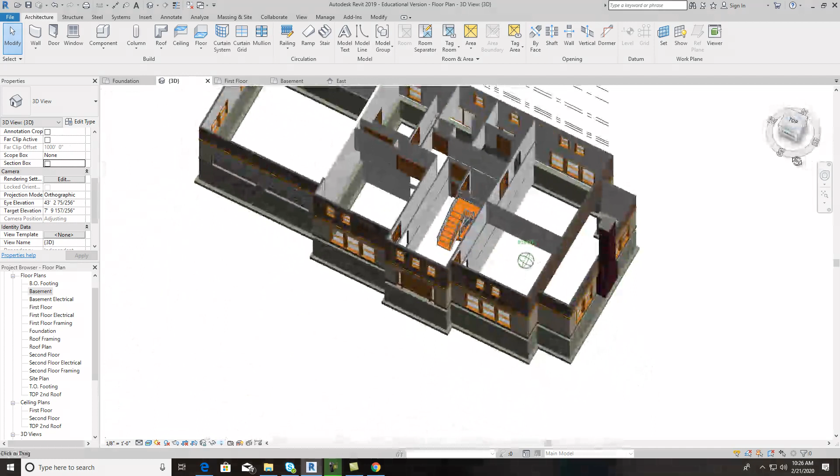Welcome back, and we have got all the stairs in now. We've got the basement walls in. We got everything looking pretty good. Now, we're going to go into the first floor, and we are going to annotate this thing correctly.

Now, in your text, there is an annotation section, and we will get into that as we get into some more drawings. A lot of the things that's in there, like notes and things of that sort, we will get back to that. And a lot of these door tags and windows, we'll get to that as we get further along.

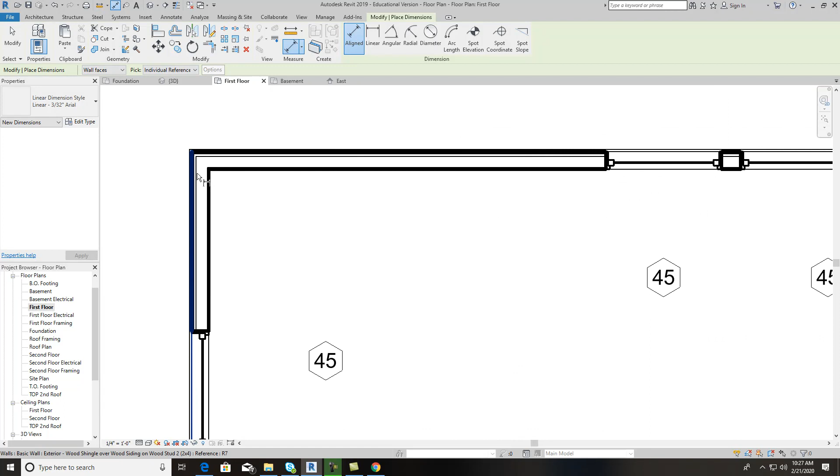So what I want to do right now is basically show you. Just go to Annotate, and I'll show you how to properly annotate a drawing. So we'll save the project at that point. Anytime it asks me to save, I will, because I don't want to lose anything. So anyways, I want to start out with aligned, wall faces, and like I told you, get that line right there. You don't want the exterior, because that exterior is going to be like siding. So that right there is what I want to grab.

And I'm just grabbing all of the exteriors here. Grab all that and bring that up. Go right behind it, and I'm just going to grab my overall of the whole thing. Kind of do it in like little stair steps. Just like that. The next one you're going to do, you're going to go back in. You're going to grab there, and you're grabbing just walls only. You're grabbing all the walls, okay?

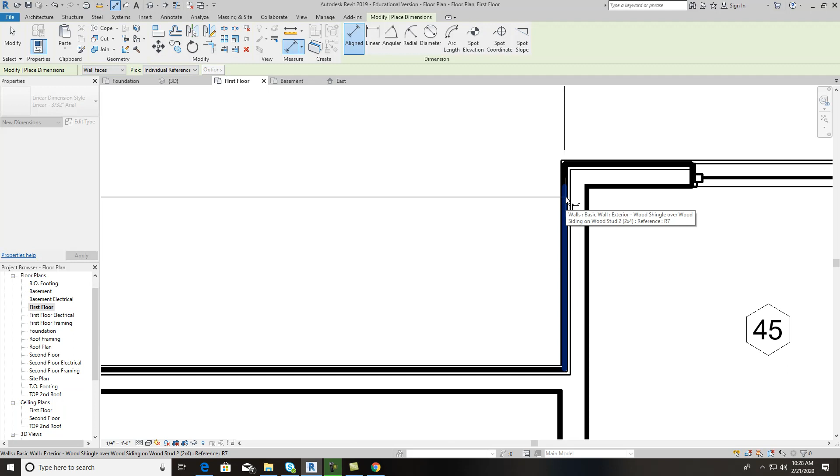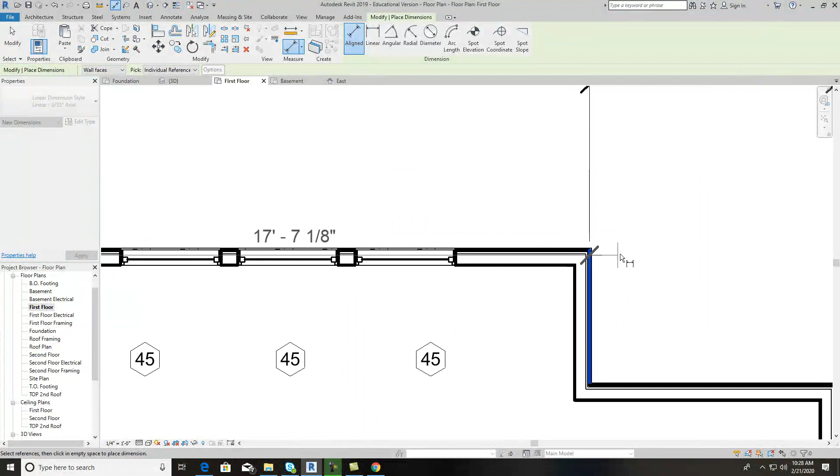I need the center on this one, okay? So we'll catch the center of that wall. The interior walls will be to the center. And I'm shocked it let me do center on that one, because most of the time you have to do wall center line. And I'll keep on coming over here. And this one should be on the wall face. And then again, wall face.

Now, I cannot remember off the top of my head if this is all. Everything should be accurate on here. We'd have to go back there and look at those actual dimensions inside just to make sure. We've done a good quality check on that. You guys did in the last week, but all of that should be correct, because those are following that. We should be just fine on that.

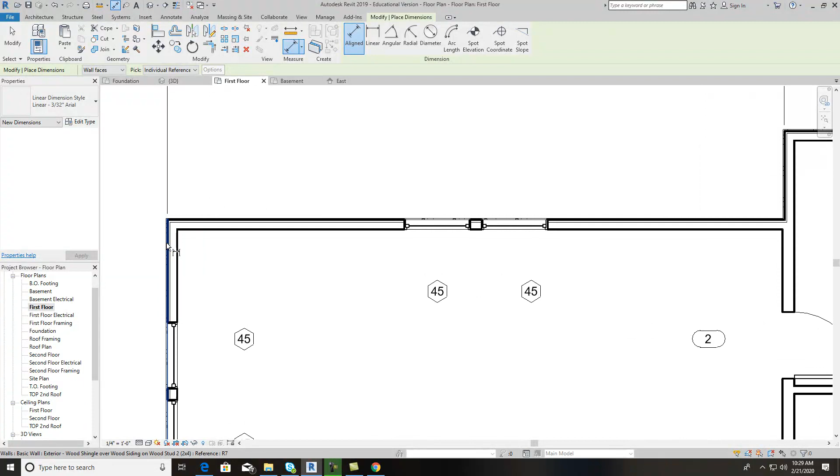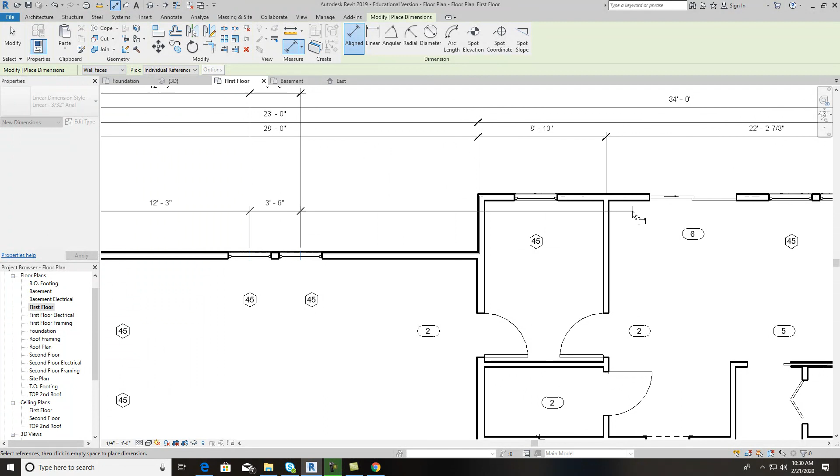The next thing you want to do is hit aligned on wall faces. Hit your wall face again, and I want to catch the center of these windows. And that would be your next thing, is center of windows. And you just catch your center points. And basically, wall faces. You catch everything, and you still can with wall faces on. And this one actually has to catch the center of that one, which is pretty nice. You're grabbing everything down through here.

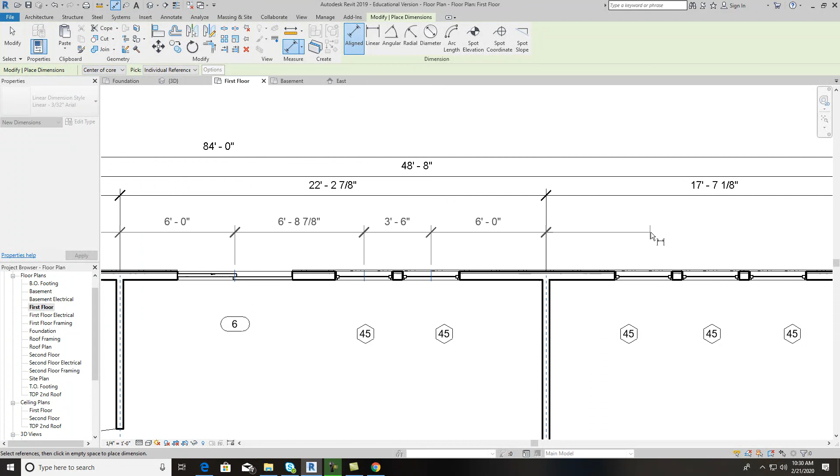Now, my window measurements might not be spot on. I don't think I actually measured those out last time. I was just showing you guys how to put those in. So if they're not dead on, don't hold that against me, right? But I want you guys to have yours dead on, right?

So wall faces, and then of course the wall face out here. And you put all that stuff in there just like that. And now you go all the way around this thing and you do that. And also, we'll do this side. You come from right here to right here. We'll go ahead and just get the walls. We'll pull that back. We'll go ahead and grab from there to there the overall.

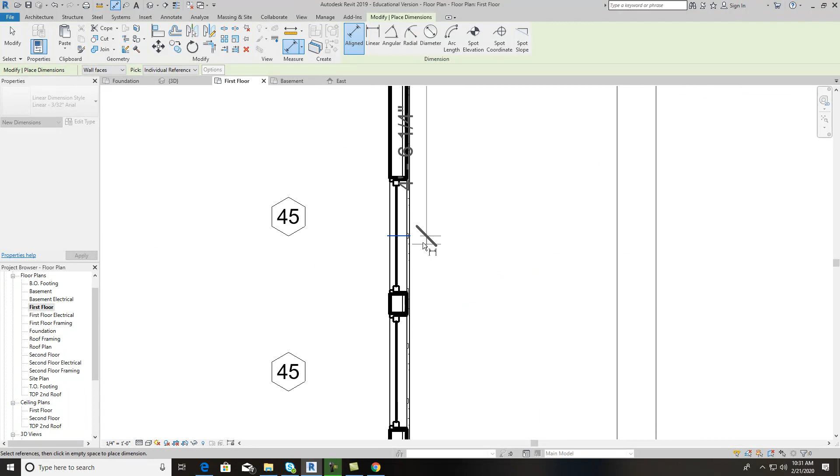And now you're going to go in here and grab everything again, including the windows. And like I said, my window spacing might be a little bit off. So like I said, my windows might not be in the accurate spot because I just went in there and put them in just to show you guys how to do it.

So the actual drawings that we had last time that were on here, and you guys went through and made sure you had everything located properly, that's the main thing that we want to look at and make sure these are right. And I found the windows here, and it looks like 5, 6, 3, 6, 3, 6 were right on that one.

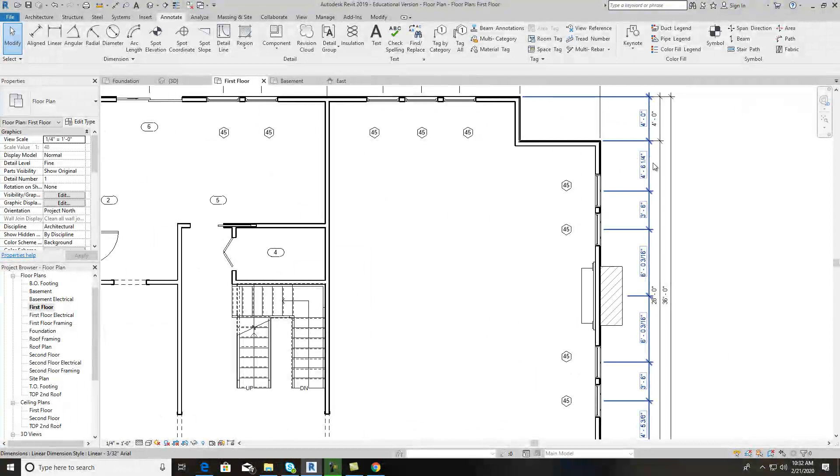I'm looking for the end here, and this one should have been from the edge. It should have been 4, 4, so I want to change it real quick. 4, 4. Okay, and it should have been 3, 6 between them. Is that looking better? And then this one down here should be also 4, 4. And this one should be 3, 6. And this one should be right in the middle, and it is not. So I want to take that and see, let's move it.

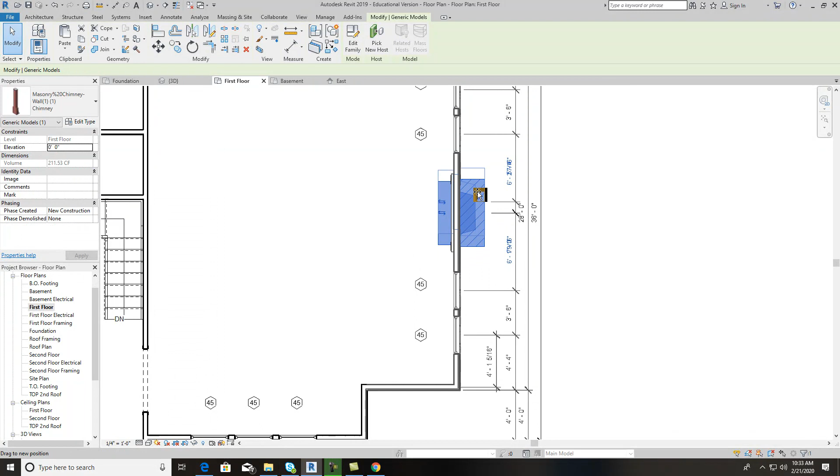And a little trick here that I use sometimes if I want to center something up, and there isn't a line that you can line the middle of that wall up. You could do that, but this is just an old school method. Kind of old school, but anyhow.

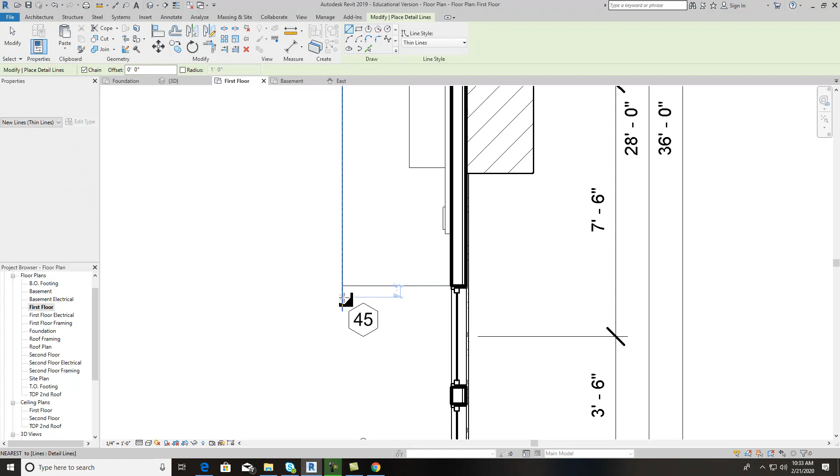I put me a line there by using my Annotate detail line, and I'll find the center of it. And now I can use my Modify tool. That way I know I am perfectly lined up. And I did that wrong—I lined this first and then this. That way you know that thing is right in the center, right in between those windows.

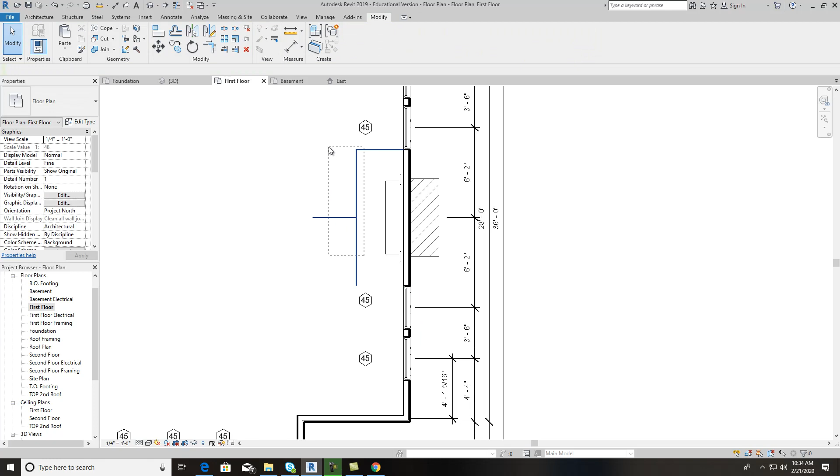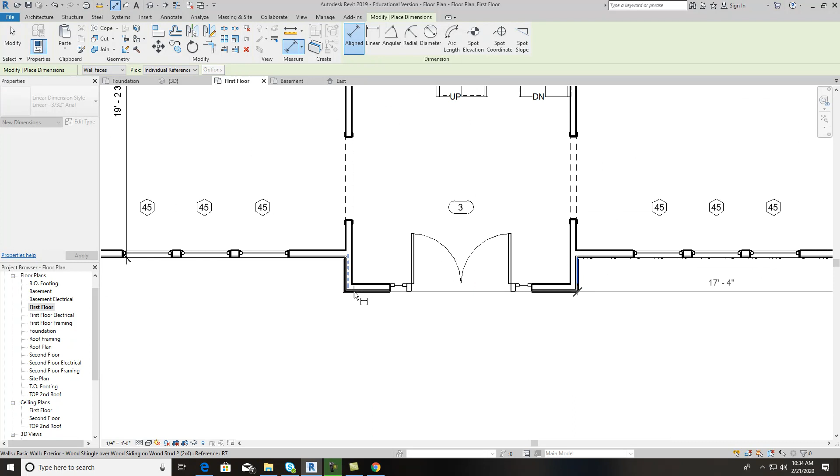And I'll get rid of that one. All that looks good. So you come around the front of it, annotate, align. You grab that—we're grabbing the outside walls first. Get all those. Make sure your measurements are accurate. Pull that out, go back in with a line and get your overall.

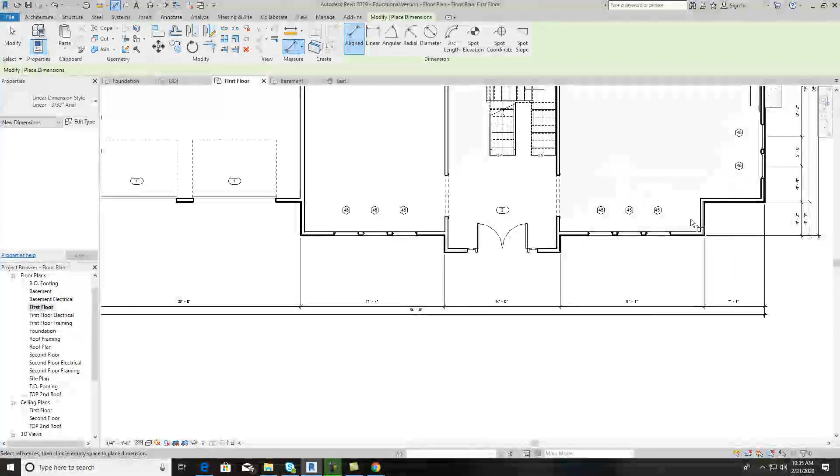And the reason you go all the way around something like this is so that you get all the measurements. You're trying to keep from putting measurements inside of the house. You're going to have to put some of them in there, and we know that. But this right here is an excellent way of doing things to keep you from having to put so many inside.

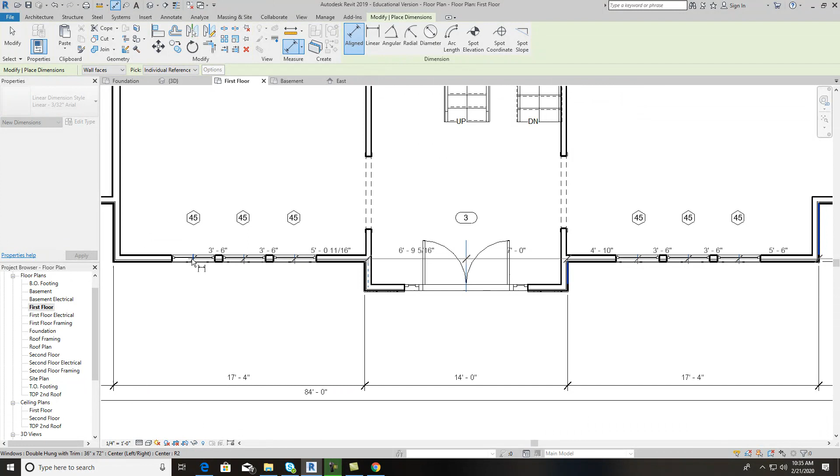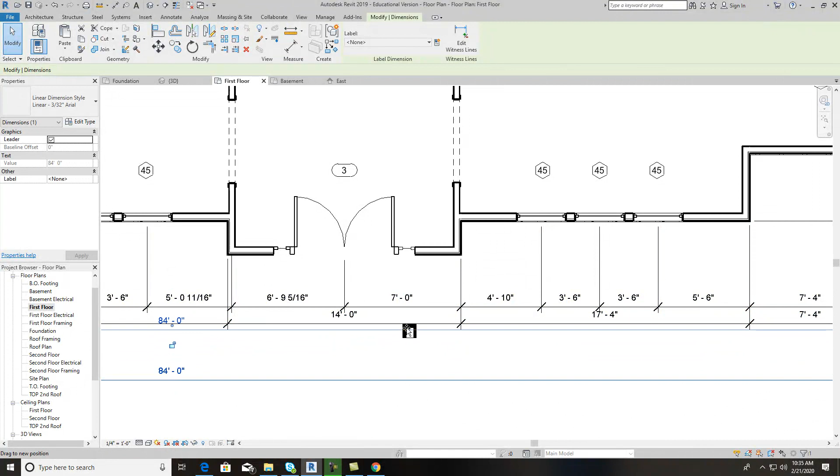And it does take a little time. We need to pull that in. They usually typically say on your print, when you print it out, you want about 1.5 inches distance from that wall to this on paper. So you just kind of roughly eyeball it and try to keep everything about the same distance away so it looks good on paper. We got one more side to do, and we'll have this thing whipped.

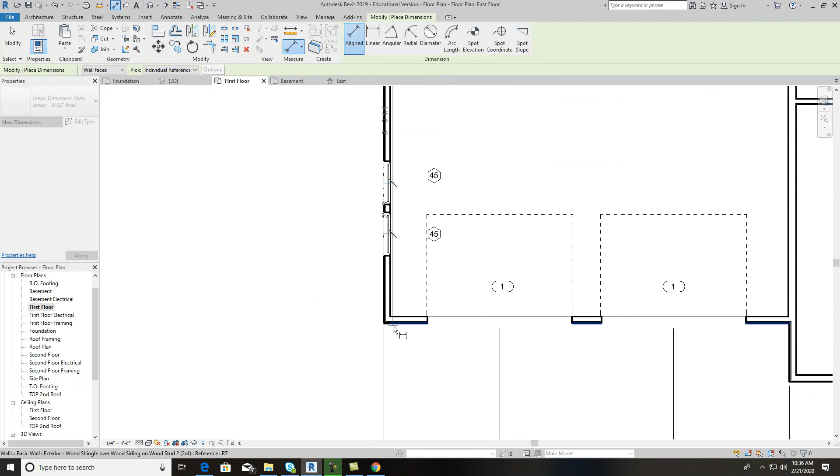Again, I'll check those windows, make sure they're in the right location. We'll pull that out about right there, come back in and get us another.

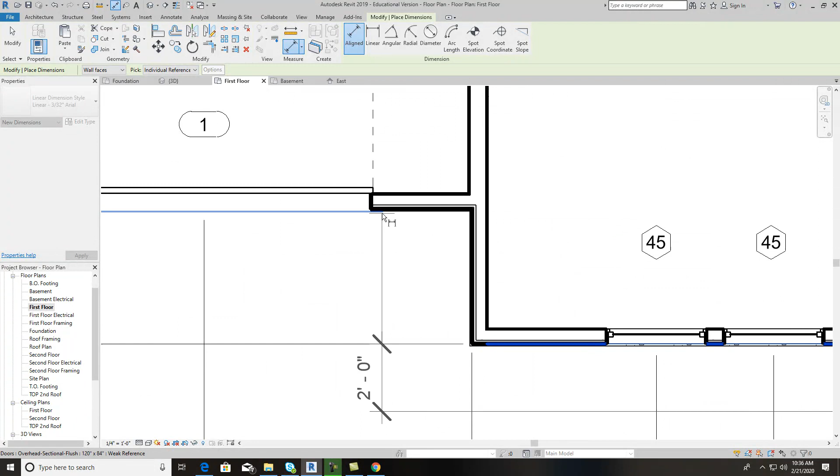And I know a lot of this stuff is redundant—we've done it several times already, a lot of the dimensions, but that's fine. I would have too many dimensions on it than not enough. Pull that over, just like that. Then, of course, you'll have your overall.

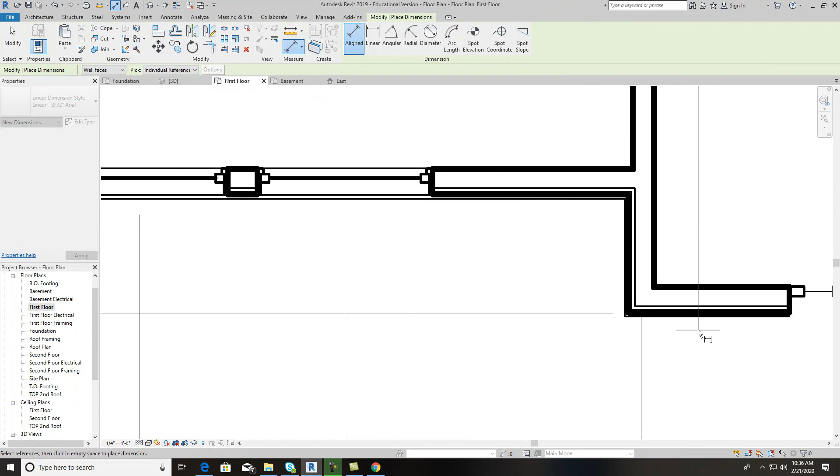And there you go—so there's all the dimensions on the outside of this thing. And now there are going to have to be some inside dimensions because not everything got dimensioned accurately. So we got to go to the inside.

And like these doors are lined up, so you could actually just put one from center to center. This one here, you can go ahead and put that in there. This one's already located, this one's located, this one's located. Now, this one right here would probably need from center to center. Okay, it is now located.

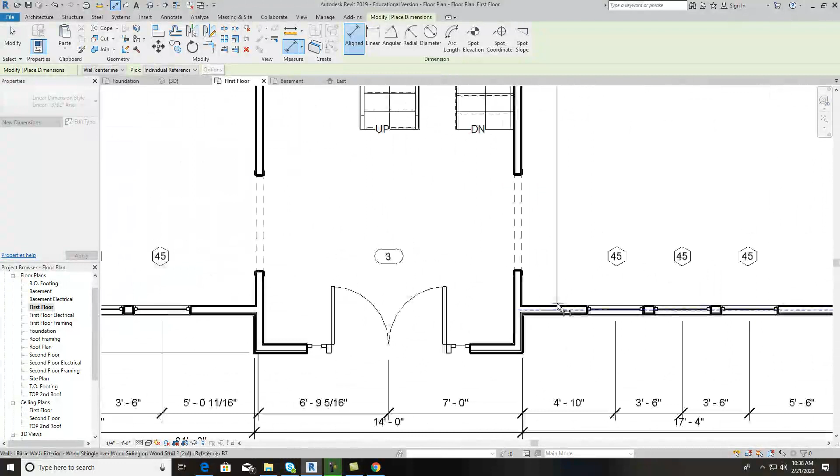This one right here is on that. So we actually, if we went from the center of this and we went all the way down to wall faces and catch this one, that's perfect—we'll do that. So it comes up here, it gets this, and that's lined straight up with that. The only other thing I see is probably, well, actually that one's good. It's got that—it would probably just be, and that's lined up with that.

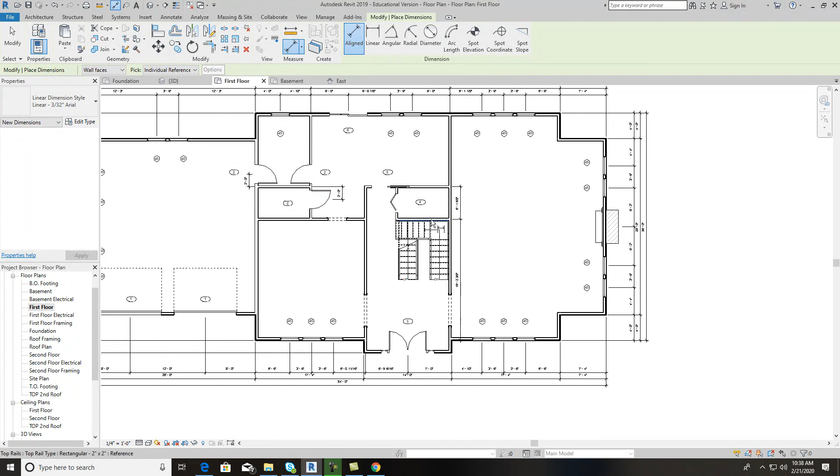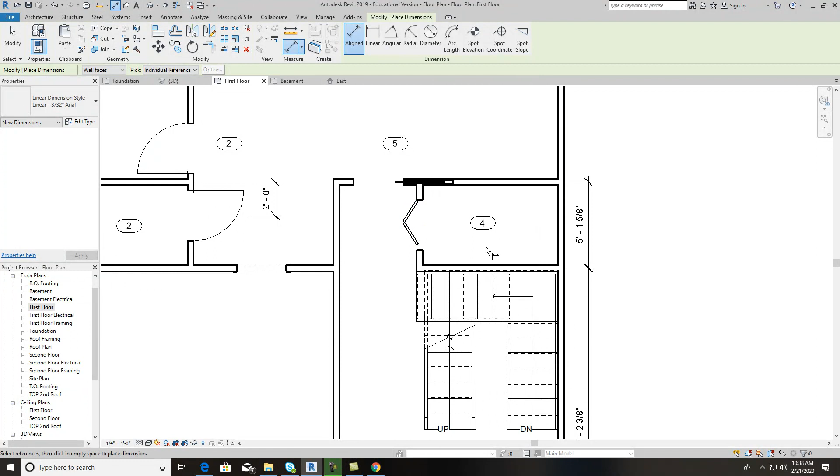So, without cluttering it anymore, it's just like a lot of times, like these doors, see how they're 2 foot away from that? You could put 2 foot typical somewhere, interior doors from wall—you can make the note, you could do that. Now, like this one, it's going to be for the contractor—they can just put that sliding door, they can actually put it in the center of that wall. So we'll just leave that as is right there.

Everything looks really good, so we got that first floor done. Now you want to do your second floor. So we go to second floor, and again on the second floor, we're not going to be able to see this. We're just going to be able to see the top of it.

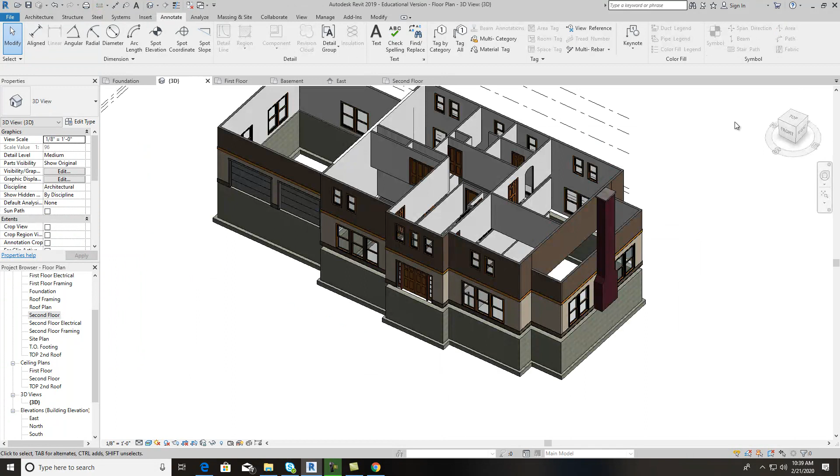And I want to go to 3D real quick, let's take a look. Okay, so second floor, all we're going to see is just this section here. We're not going to see these.

And we can do a clip plane to that to hide those sections, because that wall goes up really high, so that way we just have this. But I'm just going to keep it on there. I want to keep this on here just so that the contractors can see those sections of the underlay of the house. And a lot of times they do that with hidden lines, you'll see sometimes.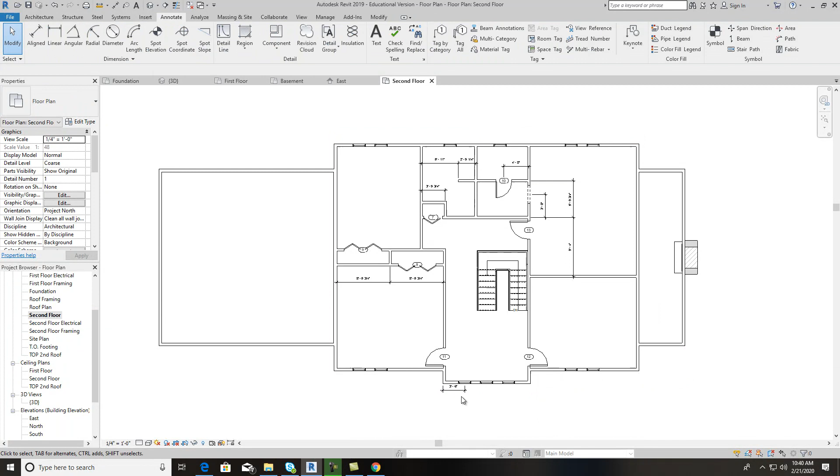And basically this is what we're going to do on this one—we're just going to do the same thing, align wall faces. We're going to catch this and this. And then we'll come in here and grab this. We got to get the centers of those.

I meant to get the walls only, but we'll go ahead and just grab everything down through here. And like I said, I don't know if I've got these windows in the right location or not. That's something we could check out later. Don't change yours if it's different than mine, because I just threw those in one day when I was putting this on in a video, just to show you how to put windows in.

But get our wall face, and then I want to go to center of walls. Grab your walls only, and then grab the face again out here. And there we go, for that. Then come down on the sides just like we did earlier. Start up here and come down to here.

Really, it would be nice if we just took those out. So let's do that real quick. We can do cut plane. Slide down, escape out of everything, just have your properties up, and you can go down to view range.

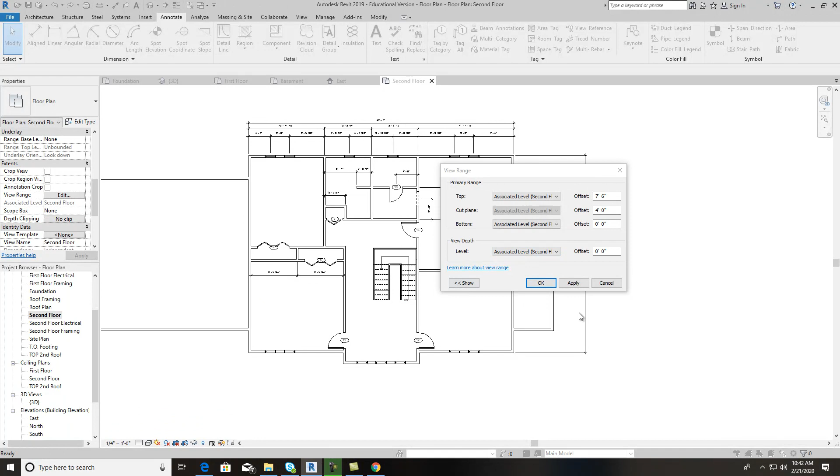This is associated to the second floor. Okay, and our view depth is the second floor. So I want to cancel. I want to make sure that I don't have any underlays on. And I don't. Okay, so let's go in here and look at my elevation.

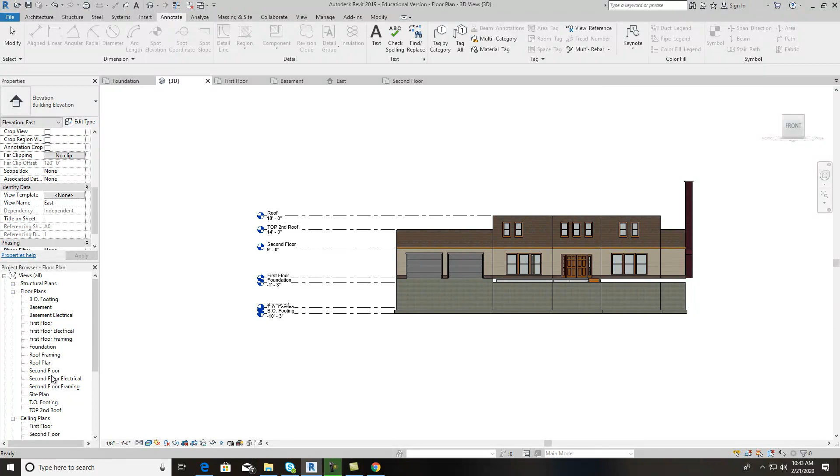Let's see, the second floor is right there. Okay, 3D. So second floor, that's why you're seeing that. This is going to the top of the second roof. And that's why we're seeing this section in, because this is a really tall section of wall here. So we'll just leave it in because of that, because I didn't know if it was under that second floor or not, but it's not.

So we're fine with that. We'll just go in here and get the rest of it. Center that and come down here and do a wall face. Bring that out there. And we'll do the same thing over here, bring it all the way down there.

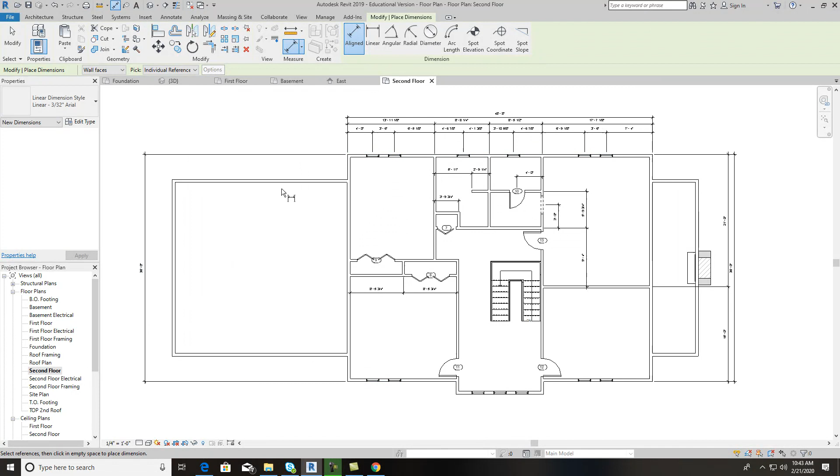Now there is an option we can do. If we want to hide this, I'll show you a trick. Remember them sunglasses? Check this out. You can grab it, hide element. You didn't delete nothing, you just hid it. And you can do that if you want to. Whenever you print, you're just going to make sure that that stays off.

And like over here, I can grab all this. You're not deleting nothing, hit Control to grab extra stuff, and hide the element. Then you can draw this stuff in a little closer to you. You see that? So you can do that. You definitely can. And then you can go in here and it looks a little bit better to do that.

And there's that different walls that we had, if y'all remember that, for that different thickness. Kind of looks weird up here, but it's okay, because that's exactly what it needs to be.

You grab that, pull it right on top of it. And then we go here in the front, align, and we'll grab that, grab our windows, grab that, grab our windows, grab that. We're just grabbing everything at first, pull it down. That'll be the first one. The next one will be just walls only. We'll pull down here. And then you'll have your overall.

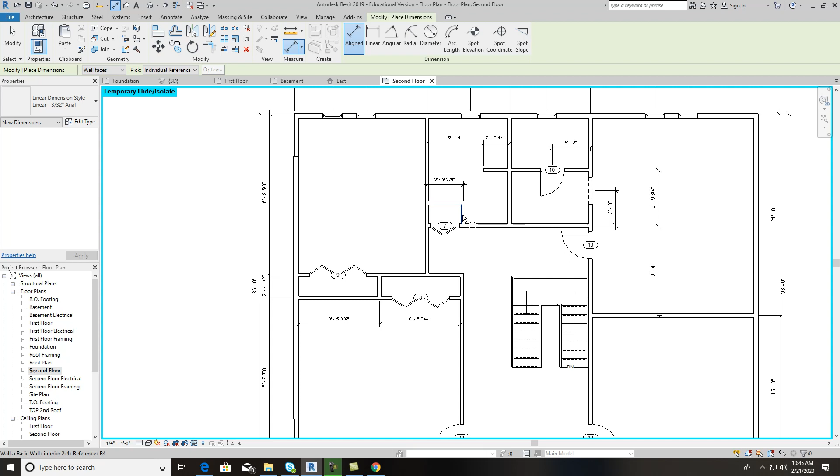Just like that. And then you just go in and see if there's anything that you need. We already had some dimensions. That's fine, that gets those. It gets this located, that's located, that's located, all that's located. Looks perfect. And you might want to put a couple in here with this stairway.

Okay, we probably want to do something like that. Just put us a dimension in, it's 8 foot, 9.5. Okay? And you can also put, and you'll probably put a note on there, and this is how you can put a note on there. Go up here to Annotate, Text, and this is how you text.

Right now it's a 3/32. I want an 1/8 of an inch text, and I've got one, 1/8 of an inch Arial text. And I want to use one of my leaders, and I come up here, and I can tell them exactly what that stairway is. I can tell you it's 3 foot wide. Make sure you cap your letters, 3 foot wide.

And you can go in there and tell them exactly what the riser height is, 6 3/4, 11 inch. So I can double click that again. So the riser is 6, 3 divided by 4, 3/4 inch. And then the tread is 11 inches. There we go.

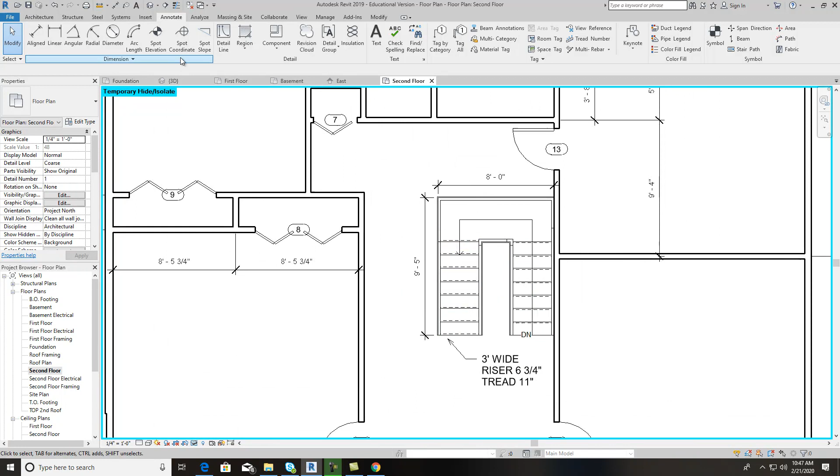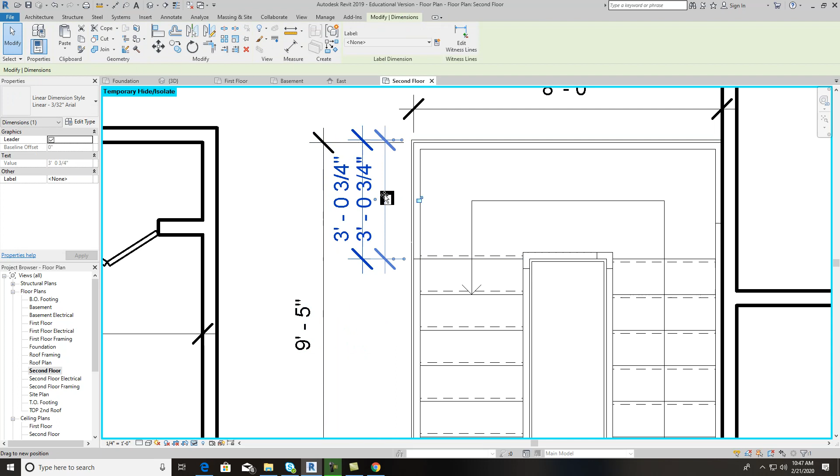Perfect. And you can also come up here and probably need to put in, you know, how wide this, and that was that overhang right there. And that's fine, that's how wide that tread is up here at the top, or the landing, I'm sorry.

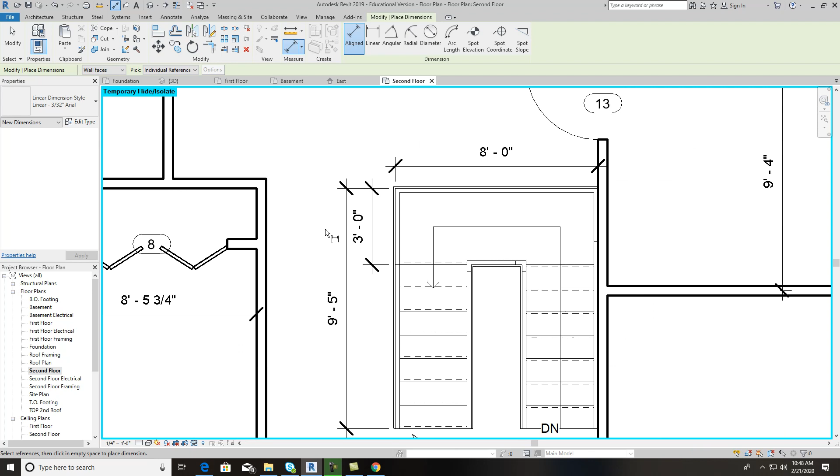Actually, that needs to be down a little bit. You just catch that one right there into there. There we go, make it 3 foot. That makes it easy. All right, so we've got that.

Everything looks really good. Now let's go to our basement. And here in our basement, we've got some more stuff to do to make the foundation plan. So we'll hold off on this one until next week, and I'll come in here and show you how to set this thing up as a basement/foundation plan, and we'll get everything set. So we'll look forward to this one next week.